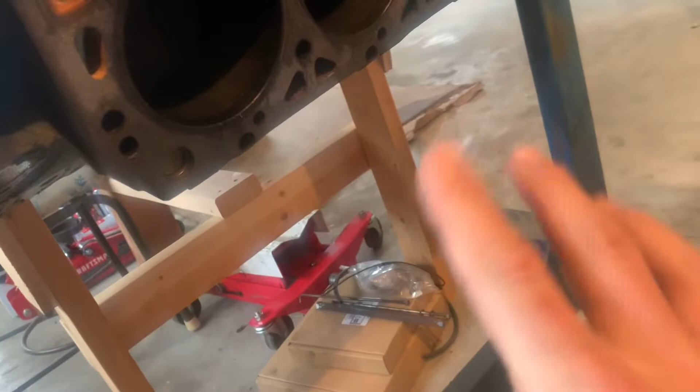Normally these are a dry liner, integral type liner engine. Single casting, I think the block weighs about 300 pounds without anything in it. This one's currently got pistons in it. As you can see, it's a closed deck type block with 1, 2, 3, 4, and I think 5. Or there's the 5th. Yeah, count them, 5 bolts per cylinder. That's your block drain. Let's go ahead and swing this puppy out.

I don't think that you're supposed to deck these blocks more than 0.010 of an inch, because you can encounter clearance issues between the flat cylinder head and the pistons. Here's a block heater, and there's where your dipstick would go, and there's a little adapter on it. These, of course, have a 4-bolt main, and they're 5-main engine.

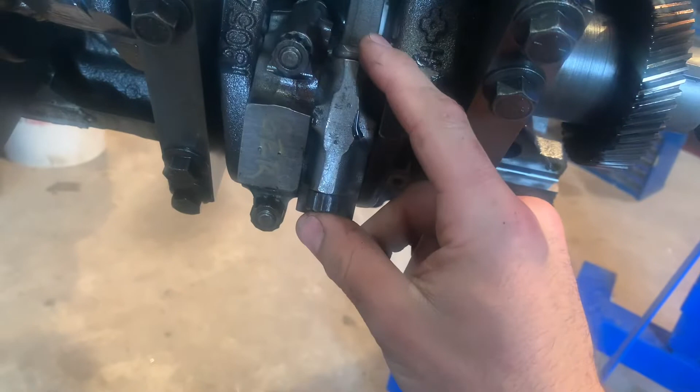These non-turbo IDIs have a little bit thinner of a connecting rod and a thinner wrist pin, full floating wrist pin. 2 of these, of course, 2 rod nuts and bolts. I don't know if you can see that up in there. Right there, they have piston oil cooling jets for underneath the pistons, and those are, I think, supplied by a little bit larger oil gallery in the turbo blocks.

The turbo blocks are a little stronger, 17% bigger oil galleries, bigger wrist pins, connecting rods, and different pistons with keystone piston rings in them. So they don't recommend turbocharging these non-turbo IDIs. Anyhow, these are a forged and nitrided crank, which can be cut by machine. You can go 10, 20, or 30 thou undersize.

After that, junk the crank. I think there's 10 oil pan bolts per side. Cork gaskets, which are a pain in the ass. But you can do these in the truck if you undo the motor mounts, disconnect the coolant hoses, and then lift it out. There are nine threaded cap screws, which hold the flywheel to the crankshaft flange here.

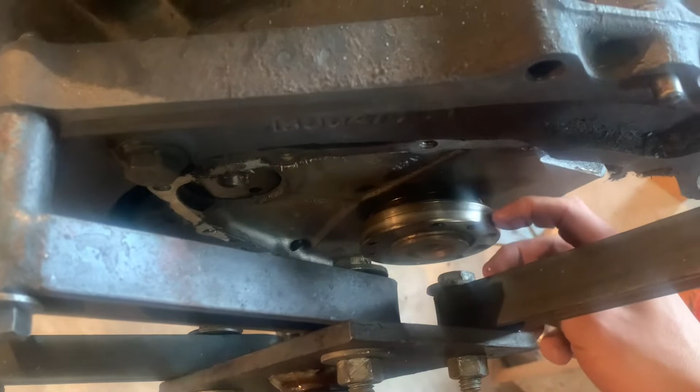And then, much like a 7.3 Power Stroke, the rear engine cover, or the rear crankshaft cover, presses the Teflon type or PTFE polytetrafluoroethylene type seal into the back. Install that dry. As you can see, there's a little bit of a lip right here where the old seal wore into the crankshaft. This is the pickup truck adapter plate.

As you can see, this adapter plate is bolted to the engine block by these 2 threaded cap screws. There is also a round type SAE bell housing for buses and medium duty trucks. I think these went up into the F5, 6, and maybe the 700 series Ford medium duty trucks.

Not a particularly powerful engine. I think this one is rated at 170 brake horsepower and 338 pounds of torque. I don't remember at what RPM. Anyhow, they're really quite a simple casting. Not a lot to them. The valves, or whatever you call these lifters, are held in by a single plate, which acts to hold down the bridges in between each pair of lifters. Let's go ahead and push this back.

All right, moving over to the cylinder heads and the other assembly. Don't mind the complete mess in the shop.

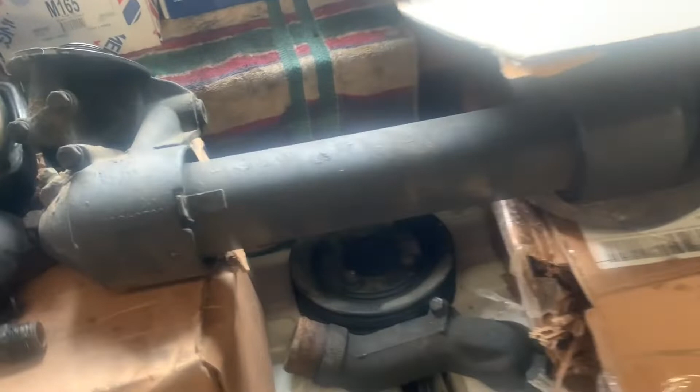They have an external type oil cooler, as is seen on most medium and heavy duty diesels. They have a single external fuel filter. These are the standard log type exhaust manifolds with 2 bolts per cylinder. They have a standard vacuum pump, as well as, you can see, this is your injection pump gear housing. Those are your lifters up here. As you can see, it's a hydraulic roller type lifter. Roller in the bottom. Check those against the cam.

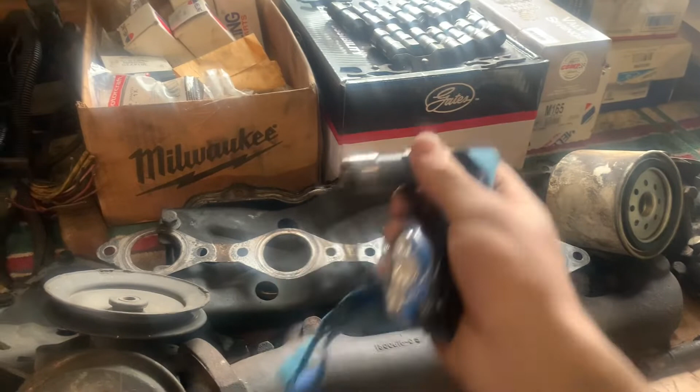I have a whole bunch of parts for them. There's the shitty old harness. I have new valves and valve springs. I have a couple of gasket kits. There's your harmonic balancer, and there's your water pump outlet.

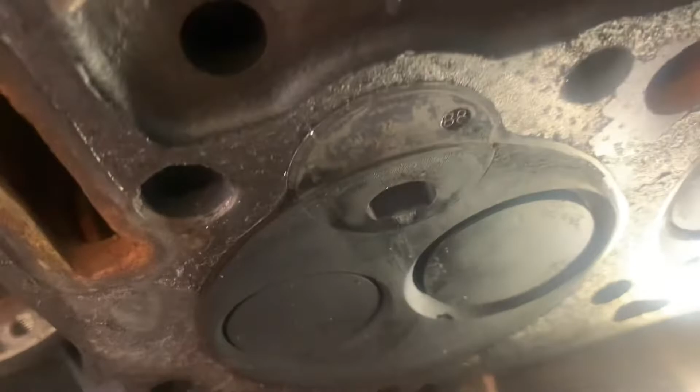Now this illustrates one of the primary problems with these IDIs. People complain about getting them to smoke, but I don't know if it was this one. Maybe it was... No, it was this side. Okay. You can probably hear this. I can catch my finger on the crack in the cylinder head. It's very common for these to crack the intake valve seats. I don't know why I'd expect it out of the exhaust valve seats, but they commonly crack the intake valve seats, and they commonly crack between the cylinder heads. They are repairable by a big shop, but not by me.

These use hardened steel valve inserts and a, oh, you can't really see that, can you? That's an Inconel stainless steel pre-combustion chamber. And as you can see, there are small cracks in it. These cracks aren't a problem until they get past the fire ring surface there.

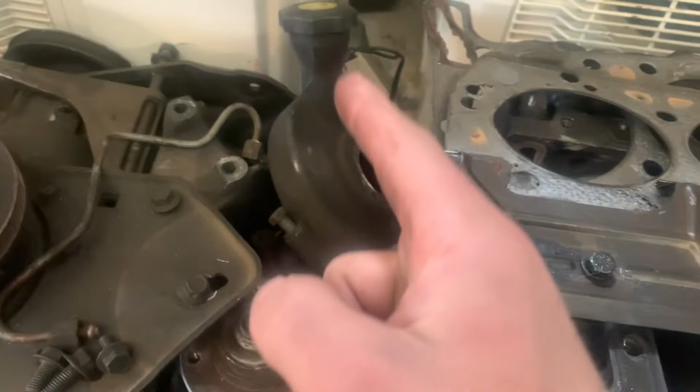Okay, what else? Oh yeah, this is the retainer for those valves. And there's another gear housing. As you can tell, it's for a 7.3 because of the outlet cap instead of the one that comes out of the front like a 6.9. And then these 2 wires in the back are for the tachometer.

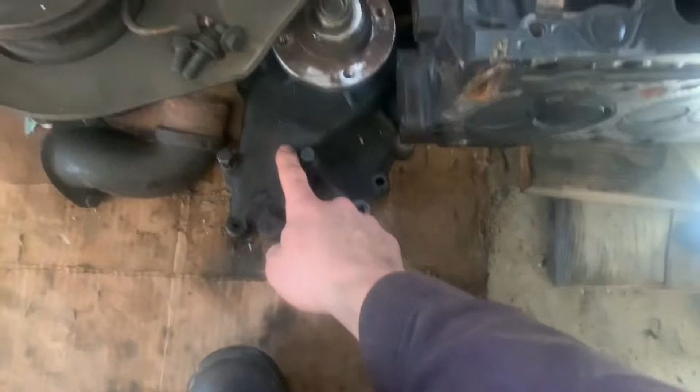This is an air conditioning compressor off that same engine, and this is the water pump. This, I think, is the inlet to the block. That comes out of the bottom, and that is a 7.3 fuel filter housing. As you can tell, it's quite complicated. 6.9s are better because they have fewer attachments on them.

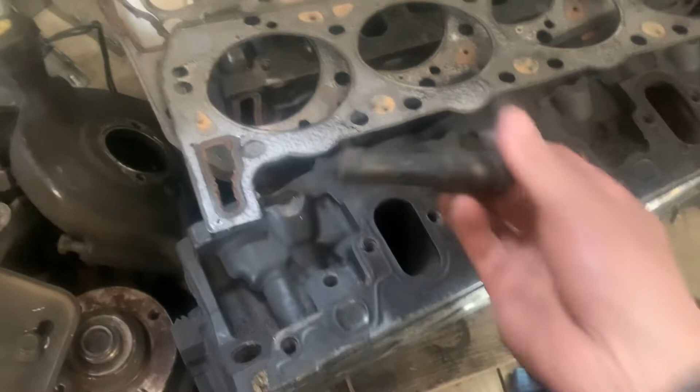These are the Stanadyne injection nozzles that mount into the pre-combustion chamber. These are a pretty common problem in that these copper crush washers that go around the bottom will not seal against the cylinder head because the bore and the seat that have been cut get eaten away because people don't change their injection nozzles. You have to take these out and test them on an injector tester or a poppet nozzle tester every 50 to 100,000 miles.

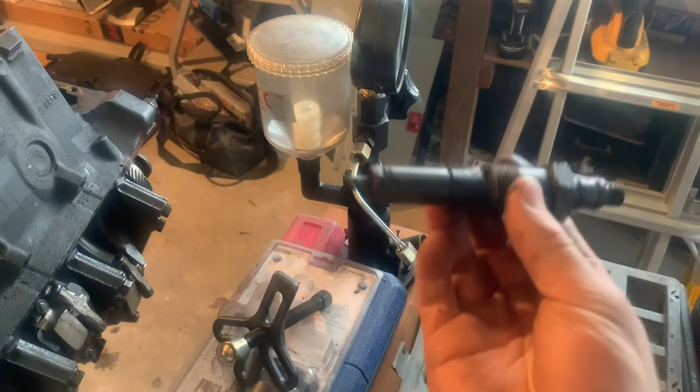Depends on the kind of driving that you do and towing with it, but as you can tell, this is a VVOR injection nozzle tester. I think it goes up to 8,000 psi, and this is how you test it: fill that up with diesel fuel, crank on that handle with this in it. Check the spray pattern, check for leakage and drips, and check the pop pressures.

They're pretty simple to check, but if you don't do it, you run the risk of washing your cylinder walls down with fuel, as well as overheating the engine. Overheating the engine is one of the main causes of cracking a head. These generally don't warp the heads, at least in my experience. I've worked on many of these, but they will crack heads.

I've taken apart 2 6.9s and a 7.3 like this recently, and all the heads off of all of those engines were cracked, primarily because people don't check their injection nozzles and they overheat them. Another cause of overheating can be lack of coolant maintenance, which is a big problem.

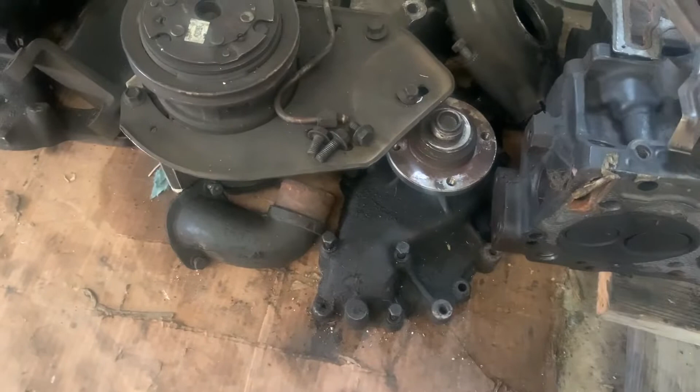We'll come back over to that engine block right now. The 6.9 liter has a 4-inch bore and a 4.18, or 4 and 180 thousandths, stroke.

If I'm not mistaken, it's slightly under square, whereas this is a square engine exactly. So this is a 4 and whatever 1.5 bore and stroke, or somewhere thereabouts. But the cylinder walls on these are 100 thousandths thinner on a 7.3. The 7.3s have a 100 thousandths thinner cylinder wall, meaning that you have to be religious with your coolant changes.

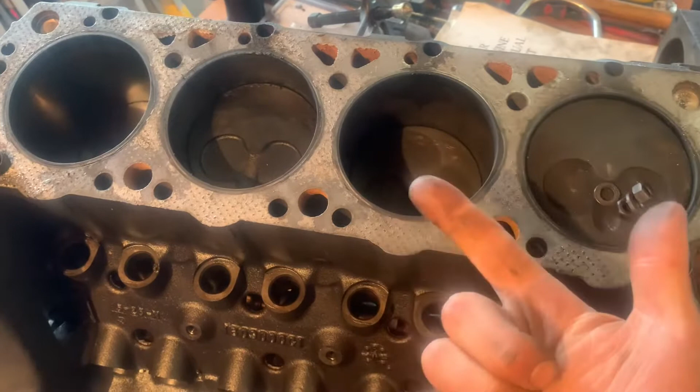If you aren't religious with coolant changes, then you increase the acidity of the coolant, which can eat through head gaskets, as it did on my Tacoma, common problem for the 4 liters, but it can also cause cavitation to occur around the outside of the cylinders. If I had a freeze plug out, you could see onto the back of the cylinder. It'll cause tiny vacuum pockets to form against the outside of that cylinder wall.

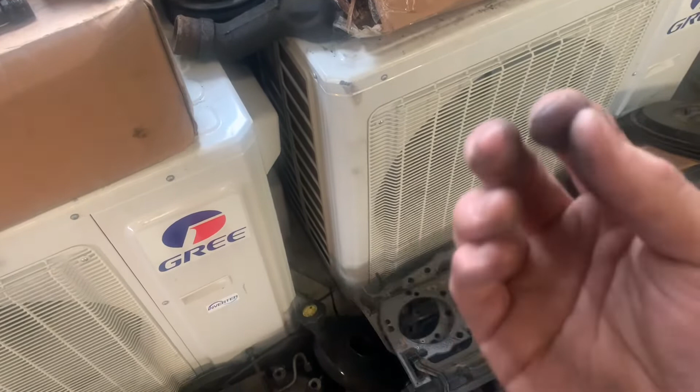And that isn't necessarily the problem so much as the collapsing of that vacuum pocket, which will take tiny or microscopic amounts of cast iron away. It depends on whether it's been sleeved or not, but either way, it'll take tiny amounts of metal away from that cylinder wall, and eventually it'll eat through the cylinder walls.

You have to be religious with your coolant changes, and whatever coolant you get, if it doesn't already have a supplemental coolant additive package in it, I recommend that you get one of those, because the silicate additive replacement keeps it from eating away at the cylinder walls.

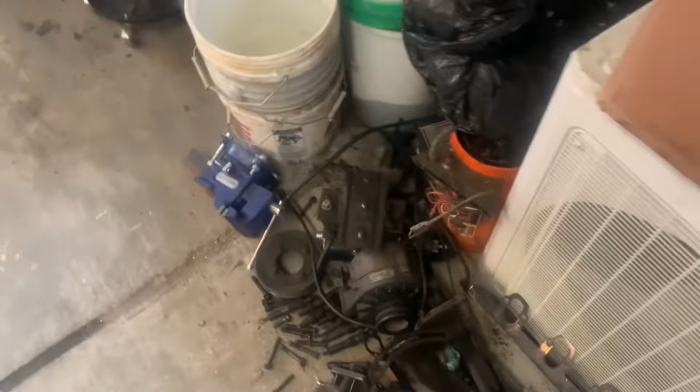Okay, over here we have the Roosa Master or Stanadyne DB2 plunger type injection pump. This maxes out at 57.5 cubic millimeters per stroke of the injection pump. That's its maximum fueling rate. I don't remember what the governor style is on it, but I need to take this one apart anyhow and free up the plungers and rebuild it a little bit. This is, I think, off of a turbo engine, so I don't know what they did to the pump.

If you see these pumps leaking, they're not terribly difficult to take apart. You can unstack them from the nose cone. You can take this head out of the body, and you can take the shaft out the back of the block. You can get reseal kits for these for like $40, and they come with all of the things that you need: seals, plungers, and other internal components. This is your top cover.

They call these a one-wire diesel for a reason. All that you need to do is supply power to this stud, and then ground to this back stud, and the engine will run, because the fuel shutoff solenoid will open and allow fuel through the injection pump. So, leading to another common problem.

Well, first of all, these pumps can be weak, so if you ever replace injection nozzles, it is recommended that you do all the injection nozzles at the same time. I recommend getting Stanadyne or Delphi replacement nozzles instead of rebuilt ones. I've had bad luck also with rebuilt injection pumps causing smoke, no start, and severe low power issues. Another common problem is these return lines.

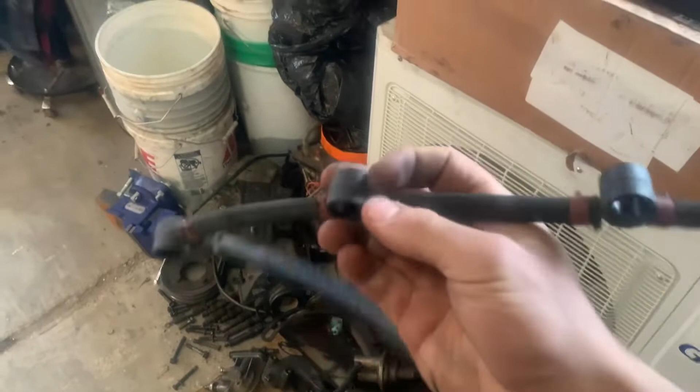So coming back to the cylinder head, you all have probably heard of these infamous plastic return lines. It's a very cheap and chintzy way of doing it, but these plastic return caps sit over the top of these injection nozzles. Let me set this on my knee here. As you can see, this return cap fits over like that, and then there's 2 O-rings that sit in this injection nozzle, like so. And then these rubber return lines direct fuel from this back to the tank.

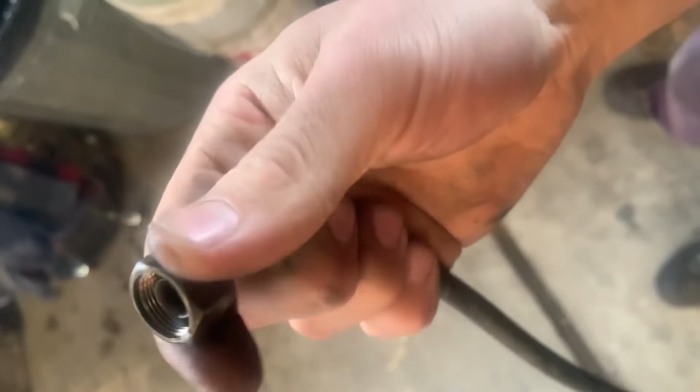So these return lines will crack and age, and every 3 to 5 years you should probably replace them, because they will leave you stranded. Another thing that I really hate about these IDI fuel systems is, you can't see it here, but there's these rubber fuel olives that live inside of these single flare fittings, and these fuel olives are a big source of pain for me, having to replace them constantly.

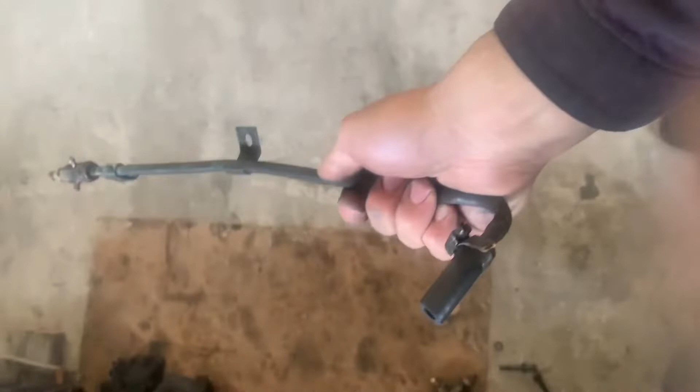This is one of the fuel return lines that runs down the valley of the block, so that's the front of the valley pan right there. So your injection pump would be sitting right here, and this runs up to the injection pump.

And inside of this junction as well, there's a fuel olive here, and there used to be one here, but whoever owned this was smart and cut that piece of shit off and put a chunk of hose on it. Hopefully they single flared it, or they used a double flare tool and did the first part of a double flare to keep that rubber on.

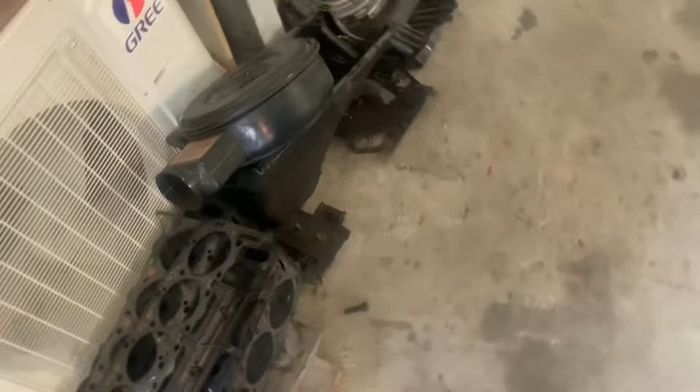Not my concern. They are pretty bulletproof engines because they are so low power, but they do have their quirks. It's like a Harley Davidson, i.e. it's so low power that it won't ever wear the engine out. Whereas a DT466, a 7.6 liter, which is marginally larger, will cause problems if it's not taken care of religiously. I take it the newer ones, the electronically injected ones, can develop blown head gaskets and oil consumption problems. But I'm not a heavy equipment mechanic, so I couldn't tell you.

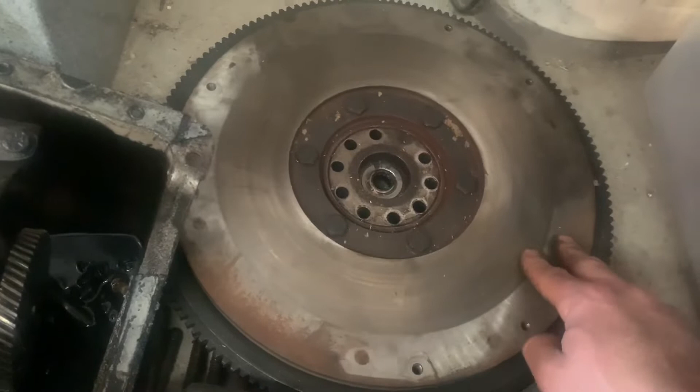Now this is an example of a dual mass flywheel. This is another one of the hated things about the ZF 5-speed transmissions that back these up, Zahnradfabrik, or I call them Kraut-built transmissions. Goddamn German puzzle box. But this mitigates the vibrations caused by this very robust diesel engine, which they claim will wear out the bearings. I don't know. It's just ZF being stupid. My truck, that old white diesel that I have on the channel here, has a single mass flywheel conversion in it. God bless whoever did that. They also have a stamped steel timing cover in the front and a stamped steel rear crank seal in the back.

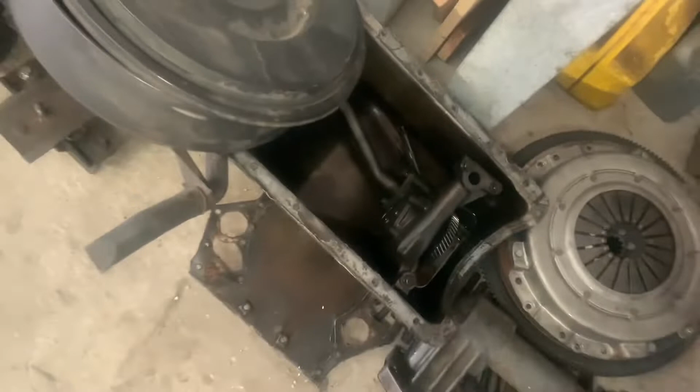This is the gear-driven oil pump out of that same engine. If it doesn't have any play when you open it up in the gear teeth, then it's pretty much guaranteed to work. I usually put a little bit of heavyweight engine oil or gear oil in them when I'm putting them back in the truck, just to make sure that they have prime and that I don't run the engine without oil.

These are a pair of remanufactured cylinder heads that are absolute pieces of shit from Odessa Cylinder Head out of Florida. I recommend getting a $300 or $500 pair of verified magnafluxed and cut heads, and then putting valves in them yourself. You'll be a lot happier than spending $1,900 on something that is shittier than the work that you can do in your garage over the span of 4 or 5 weekends.

Let me see if I have one. No, I don't think I have a rear main seal in here left. But this is a front crank seal, and the rear crank seal looks very similar to this, but it says install dry because it's a PTFE seal. This front crank seal and the other rear crank seals are not, so you install them wet. I usually lubricate them with engine oil or grease.

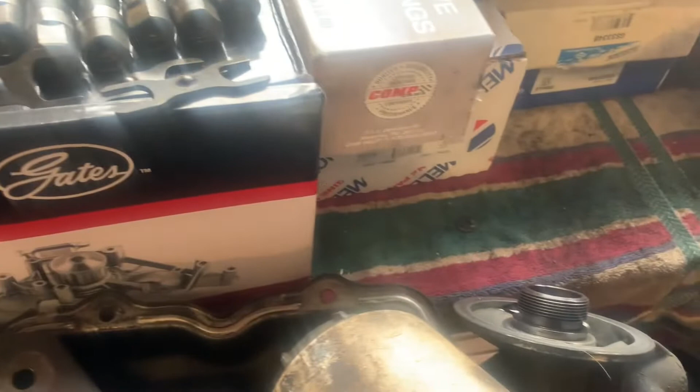Standard valve cover gaskets and valve covers or rocker covers, depending. There's a bunch of different sensors that live on them. I don't remember the part number for these crankcase depression regulators, whatever you call them, but this serves the same purpose as a positive crankcase ventilation. There's your part number. If you need a CDR valve, I recommend going Ford for these, but the only place you can find them is on eBay.

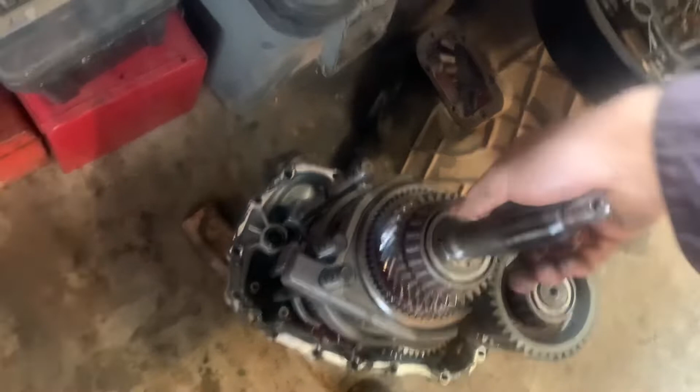This is only tangentially related, but this is a ZF5 with a 420-pound rating on it. I just put this in my truck, and it is locked into 4th gear. I don't know if you can tell, but the synchronizer ring here will not move back and forth. I am forcing against it, as you can tell, and I am moving the whole transmission. So this sucker welded itself up, and I got to take that transmission right back out, which I guess I'm good at taking ZF transmissions out now.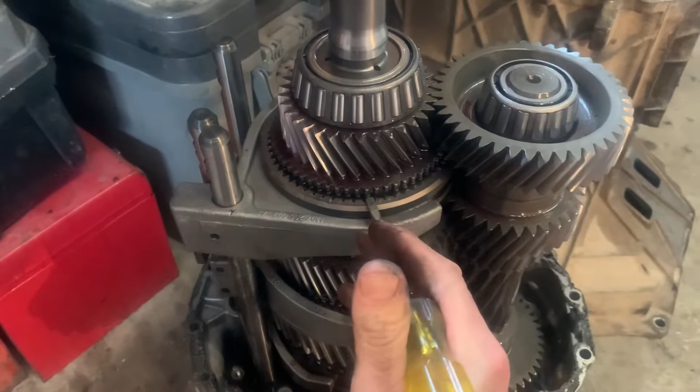But you can see this one moves pretty freely, which it has to move just a little bit inside of that hub and slider assembly. Otherwise, the slider here cannot synchronize. It cannot force this blocking ring up, and the tabs keep it from going over and engaging the teeth on the actual gear before the synchronizing action against the cone clutching surface of this input shaft has been achieved. It's actually a pretty clever little design, but I don't really know how it welded itself up. Maybe I used Mercon 5, and maybe that caused the problem.

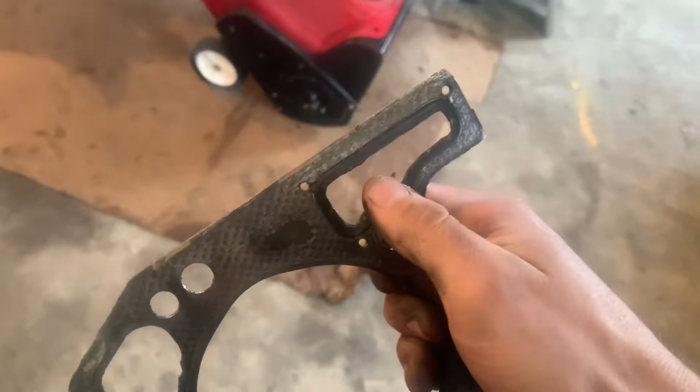I don't know. This is a 6.9 liter IDI head gasket, but it illustrates the problem perfectly well. This is a composite head gasket. I recently learned that these are made by the Beater process. These are made out of asbestos, graphite, etc., and they're stamped into place with these steel fire rings. And then at each end there are these Viton rubber O-rings that seal in coolant. Those are coolant passages.

This, however, will indicate just exactly where your head gasket's blown. As you can see here, there's a lot of soot, etc. Well, the light's not great over here. Let's do this over on the workbench where you can see it better.

All right, let's move some things around here, get these out of the way, and get all my shit greasy because I'm a grease pit.

Okay, so these composite head gaskets are older technology. I think they came around in the 1940s with the Beater process with World War II, and they really tried to phase them out in the 1990s. But you still see these popping up randomly from place to place. Anyhow, you can see how this area is eaten away by highly corrosive, high temperature combustion gases, which eat past this fire ring.

This is another problem with these. As the engine runs, the cylinder head gets lifted away from this head gasket by upwards of 1/1000th of an inch. While these are running under full load, they can experience anywhere between 3,000 and 4,000 pounds per square inch above the piston, which can in turn cause head gasket sealing issues if the engine is overheated.

But again, you can see where this has just been eaten away and where soot is really intruding into the head gasket. Okay. Well, I'll go illustrate next the problems that are had with the sealing of that injection nozzle against the cylinder head's bore and seat in there.

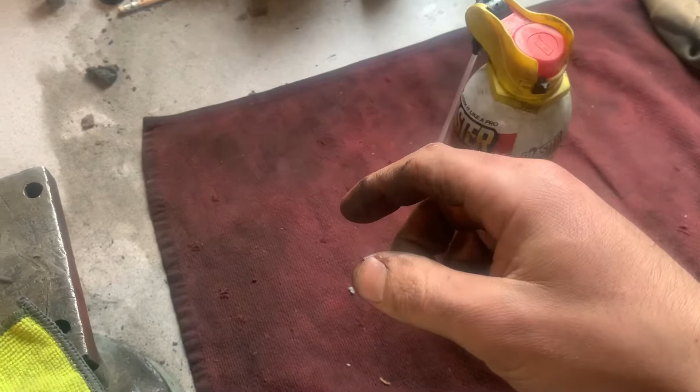I was talking to a gentleman who works at Napa. He used to bend wrenches, and he was mentioning to me that you can put crush washer after crush washer in there and it still won't solve the problem. So what I usually do to test that is grab something like PB Blaster or WD-40 like this, shake it up, and then I'll spray it around the threads that are exposed near the cylinder head.

So I'll drop an injection nozzle here. This one still has threads on it. There's one that doesn't have any threads on it anymore. This was one that we used to pull another one out of these cylinder heads. Another part of an injection nozzle. But as you can tell, this injection nozzle would sit about like this in the cylinder head, and there would be threads here. So normally, when I first start the truck up, I'll spray some PB Blaster in here, see if it's leaking, and then I'll continue to run the engine.

What I've noticed with these engines is generally if you have one of these seats and it's not too far gone, the engine will run fine. It'll actually have some oomph behind it, but as it warms up, the misfire will get worse and you'll be able to start hearing it misfire as the engine's running. So that's just something to be wary of.

If you have the proper bits, I'm sure that you can recut the injector seat and get your crush washer to seal there. But again, I'm unsure of how thick the cast iron is underneath that injector nozzle seat, so that is something to be wary of. Try to take away as little material as you can if you were to try and recut that injector seat.

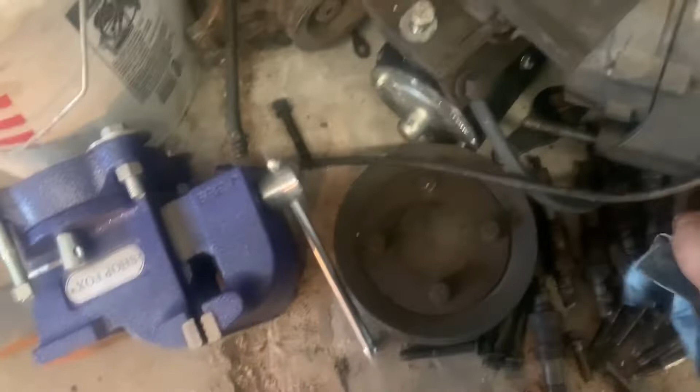Another thing to note, if you want to get that seat cut flat, then you can measure the diameter of this pintle tip right here above my middle finger. And then get a drill bit or something else that is the same diameter and use that as a pilot to keep that flat and concentric inside of the bore that injection nozzle seats in.

That really does outline, verbally at least, the common problems with these engines. I did have the main caps off and the rod caps. I'm going to pull the piston so I can hone the bores, but it's very common to see, well, some shit fell down into these, but to see scoring along the inside of these cylinder walls, as well as to see severely scored piston skirts. Excuse me.

And that can happen from a lack of oil. I took apart a 6.9 where all the cam bearings had been wiped out in it, and the rod bearings in it were likewise pretty well seized. It had lower than normal oil pressure, so it's another thing to be wary of.

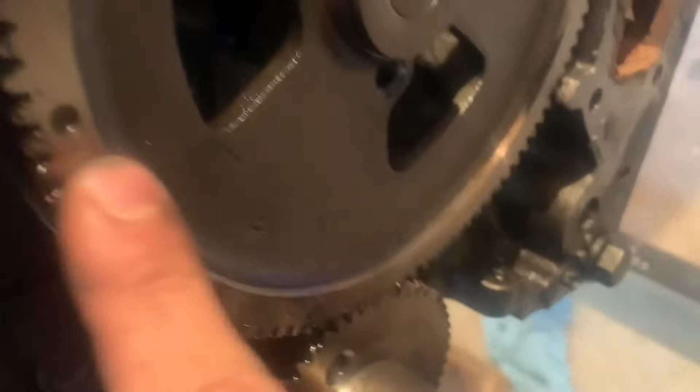I always inspect the camshaft journals too if I have them apart, and I might go ahead and pull this camshaft out. They're not hard to time. You just line up a couple of dots over here. I think their older ones are Y to Y and the newer ones are dot to dot for the injection pump, and then I don't remember. Maybe there's Ys. Yeah, as you can see, there's a Y right there, and then there's a dot right here, and there will be 2 dots on the injection pump gear, and you put this dot between the 2 dots, and that'll align the teeth properly.

Or maybe it's, no, it's these two dots, I think, get lined up. Either way, don't trust me. Refer to your service manual. I use this Ford OEM 6.9 diesel engine supplement because these are basically the same engine. This one's just been bored over. The valve trains in the 7.3s I've heard are a little bit heavier duty. I haven't been able to notice any differences between the two, but

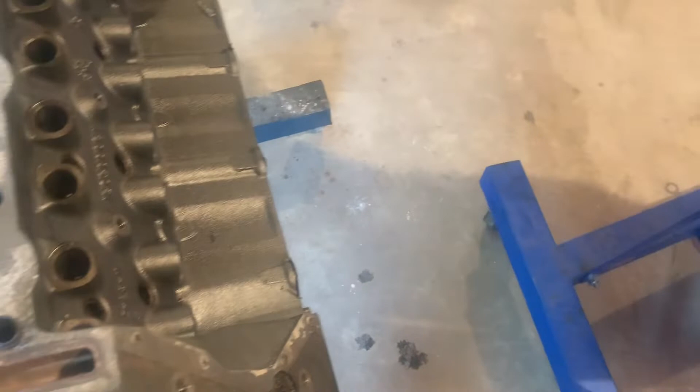whatever. These 7.3s also utilize a 1/2-inch cylinder head bolt versus the 6.9s utilized a 7/16 shaft diameter cylinder head bolt. So that's something to be aware of. The heads do not interchange between them without some machining and creativity.

Just a beautiful day out there. Looking towards the mountains to the south.

All right. If I think of anything else, I'll interject it somewhere in this video, but I don't anticipate that will be it. If your IDI blows a freeze plug out the block, then suspect a cylinder head gasket. That's one of the engines that I bought. I bought 2 6.9s and a ZF off the internet, and all 3 of them have fucked off on me. So I would not recommend buying parts off the internet. Or if you're going to do it, have them rebuilt. And these are getting harder and harder to find parts for.

Oh yeah, there's the vane type power steering pump, Saginaw or whatever. They always whine, but I've had good luck with them on these IDIs. They're a little heavier duty. Oh, here you go. Here's the turbo. So everybody loves turbos on these IDIs. It really does wake them up. And they need it, you know, turbos and diesels go together, bread and butter.

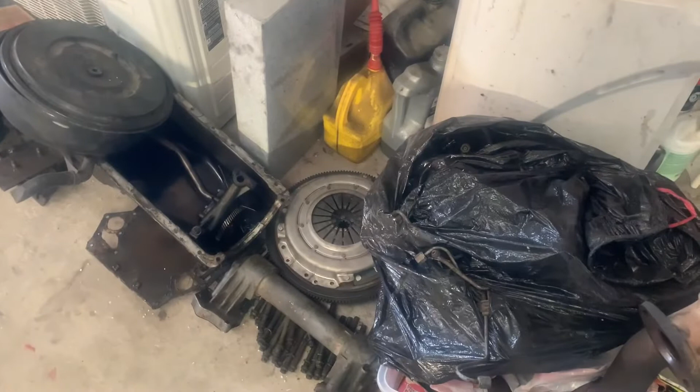But the problem with these IDIs is they're such a high compression engine, right? The original 1983 6.9s had a 20 1/2 to 1 compression ratio. The 6.9s after that, 84, and then the 7.3s had a 21 1/2 to 1 compression ratio. So if you start forcing extra air into them, they don't cotton particularly well to it. It does wreak havoc on the piston rings. It can bend connecting rods and wrist pins, which again is why the turbo motors have thicker wrist pins, keystone rings, etc.

But if you're going to do this, this is a factory turbo downpipe. I don't want to go digging through it, but I have a bunch of parts for it in here. Anyhow, yeah, there's a turbo manifold. But generally they run 10 to 12 pounds of boost maximum, 5 to 6 normally. Again, they're just such a high compression engine that you really do risk bending parts when they're running. They weren't originally intended for turbochargers, so that's why you see things like even an old 12-valve Cummins or the newer Duramaxes or Power Strokes have 16 or 17 to 1 compression ratios, so they can run higher boost pressures.

Aftermarket manufacturers do sell pistons for these IDI diesels. Lower compression pistons, low deck pistons, that will decrease the compression ratio enough that you can force 20-30 pounds of boost into these without risking not detonation problems, but pre-ignition, hot spots, and bending parts. So yeah, hyper-eutectic pistons too, I think. Don't quote me on that, though.

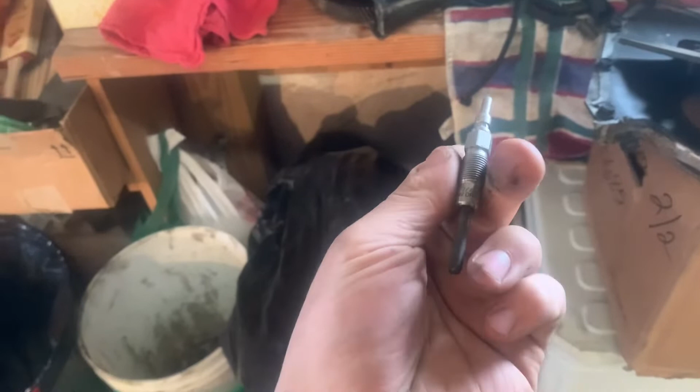Okay, so this is an example of an aftermarket glow plug. I absolutely do not recommend that anybody ever uses anything other than the Motorcraft ZD9. That is Zebra Delta 9 glow plugs. They're the bullet style glow plug with these small tips, and then they have a connector on the back, which is mirrored by a bullet style connector that comes out of a wiring harness.

Don't mind me. But as you can see, this is what happens over time. These wiring harnesses get really shitty, they get really old and really brittle. I just redid all the glow plug wiring in the wiring harness in my truck that fits onto the end of these.

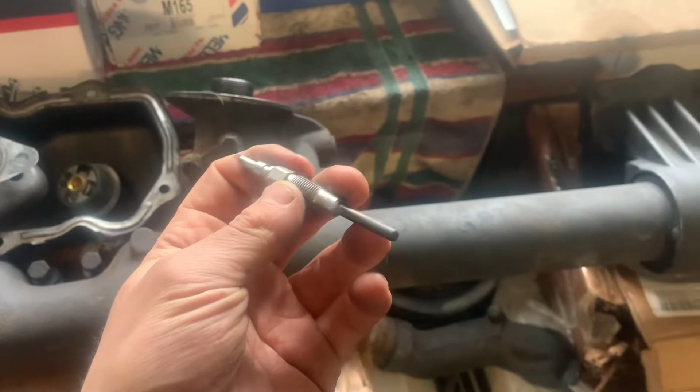I don't have the packaging here anymore, but I think it was Swag Performance Parts that sells a kit for $14.99 or whatever of heat shrink style glow plugs. I pulled Autolites out of these cylinder heads that came out of the block over there, and the tips of all of these were eaten almost halfway back.

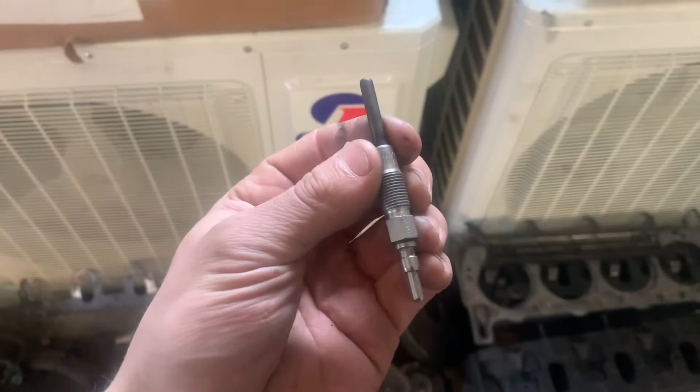The guy that I bought it off of pulled one of the glow plugs and thought he broke it off in the head, but he hadn't. The tips of these had been eaten all the way back to right about there. Every single one. Do not buy anything other than Motorcraft glow plugs. You will break them off or they will disintegrate and fall into your cylinder head or into your combustion chamber.

Another thing, people will use ether with these, and Sam was mentioning that if you use ether enough and you hard start it enough, eventually these hardened Inconel pre-chambers will crack along there, and they can drop half the pre-chamber into the piston and destroy the engine that way. Ether isn't the hardest thing on them, but it's not recommended that you use copious quantities of it.

If you plug it in and you use the glow plugs, these have a solid state controller, so the solid state controller expects to see a certain amount of resistance and a certain voltage, and if one of these glow plugs burns out, then the resistance becomes too high in the circuit for the amount of amperage that it's trying to pass through at a set voltage, and so the solid state controller turns off.

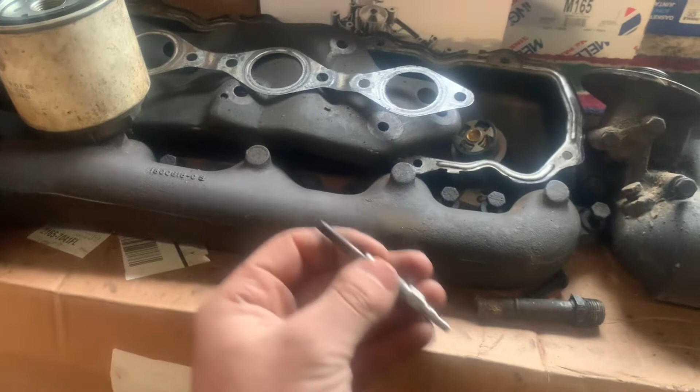And then it turns back on, sends some voltage and amperage to the circuit, sees that there's too much resistance, and turns off. And that's why they short cycle and click, click, click, on and off, back and forth. That can be an indication either that one of the connectors right there that I just showed you is burnt out, or is arcing, or has too much resistance, or is broken, or that the glow plug

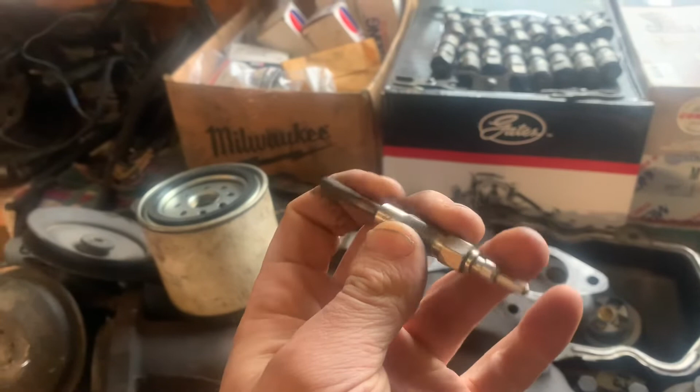itself is burnt out. You want to see between 0.01 and 0.06 ohms of resistance, I believe, between this pencil tip and the threads to the body of the glow plug, because they ground through the cylinder head, which is another reason engine grounds are important. I think the fuse is rated to 100 amps for these engines, but I think they draw between 40 and 60 amps, depending on how cold it is outside.

Okay, I covered ether, covered the glow plugs, the wiring. Yeah, these IDI diesels don't start well in the cold because you see how flat the cylinder head is, and it's a 21 to 1 compression ratio, 21.5 to 1. So as that piston comes up, all the gas is forced out of the area above the piston and up into this pre-chamber here, which is fine and it works,

but all of the heat that's developed in the combustion chamber, at least this is my working hypothesis, by the compression of the gases between that piston, which is traveling up in its bore, and the stationary cylinder head and valves, is dissipated inside of this pre-combustion chamber. Right, so any residual heat that you had inside of here, it really does get sapped away.

But that really wouldn't make sense to me if the entire engine is 3 degrees below 0 Fahrenheit. Then the whole engine is going to sap heat away. It's odd to me that they don't start well in the cold, but they will not start without glow plugs, it seems, unless they are freshly shut off from being hot.

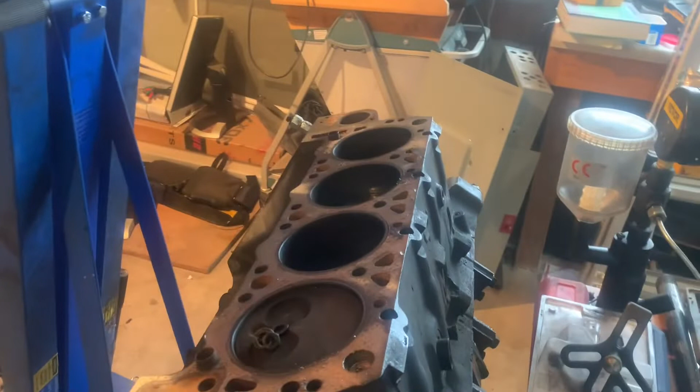Another thing, people always claim that these engines can't be run at high RPM, but consider people build big block Cadillacs, Chevrolets, like those old 472 or 500 big block Cadillacs, or big block Chevs, big block Fords, and they'll run them up to 5,000 RPM with the right valve springs, and the same is true of these IDIs.

If you adjust the valve train, i.e. the push rods, the cams, the lifters, and the valves, as well as the valve springs and the rocker arms, you can actually get these things to turn upwards of 4,500 or 5,000 RPM. I have no interest in doing that, and I don't have any resources to back me up, so I'm not going to make that claim in earnest, but I've heard that is what you can do to these engines. Either way, these engines will run happily anywhere up to their fuel-governed top RPM of 3,600.

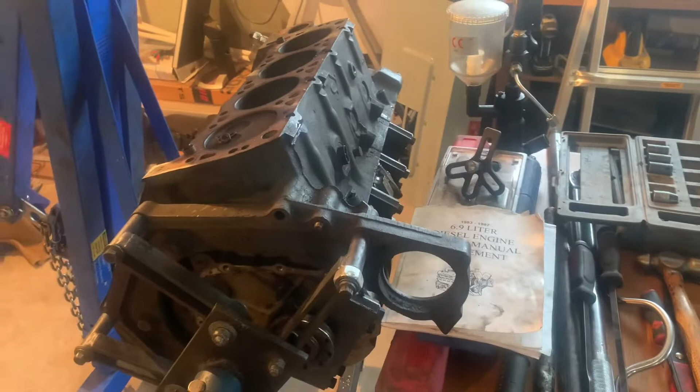I've towed with these just fine, turning 2,800 RPM, 2,900 RPM, doing 75 or 80 on the interstate, and haven't ever had a problem with them. They sing, actually, quite happily. They like revs. Zip ties and bias plies, I think, is correct in that assertion. These engines really do like revs. Sam was also mentioning that, the gentleman I talked to. These motors like revs, so that way they can flow more air and produce a little bit more power. They aren't like a big old NH or NTC Cummins where they don't like going fast. They're torquey, but they need RPMs to produce their optimal amount of power.

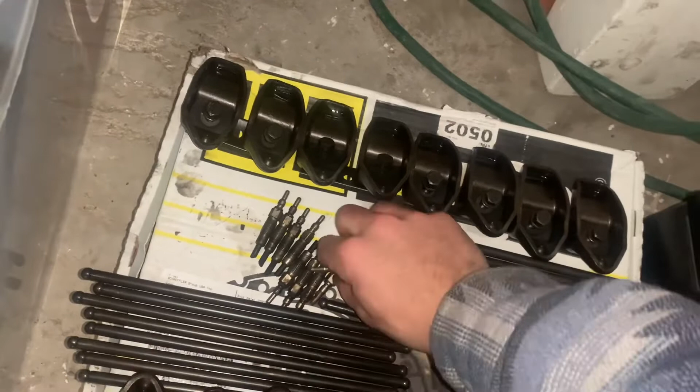Okay, well, my phone just shut off, but I don't think I showed you any of this, so hopefully I'll remember to kill that last video.

Oh, this one's perfect too. Right, see, this part of the wiring harness came off with it, which is another reason these glow plugs suck. The wiring on them is just awful. But look at that tip. Look at that tip. And notice how every single one of these glow plugs' tips are eaten away.

Look at that. They're supposed to be nice and round, and they're supposed to be a little over 1.25 inches long. And what are all these? 1/2 inch, maybe 5/8, and they're all eaten away. That's really bad for your cylinder walls. It's bad for your valves. It's just bad for your engine. Don't buy Autolite glow plugs.

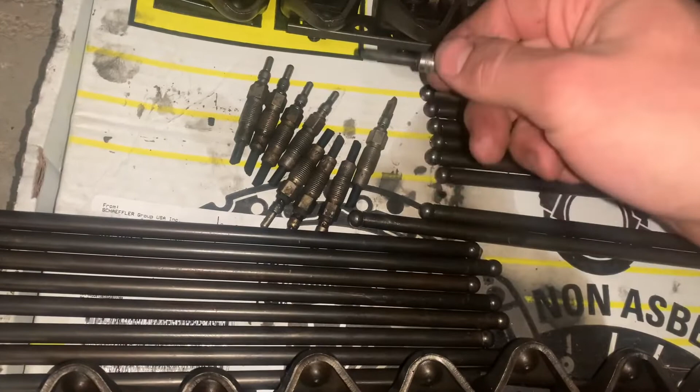They're awful. These are standard type hollow push rods that supply oil to the rocker arms. They're interchangeable, of course, because they're a hydraulic roller lifter. Then here are the rocker arms. They exist simultaneously on a bridge that returns them to their position as they flex. Pretty bulletproof, really. But yeah, again, if you know what you're doing and you buy quality parts, you won't have these problems. But flounder long and hard enough and you still don't have any guarantee of success.

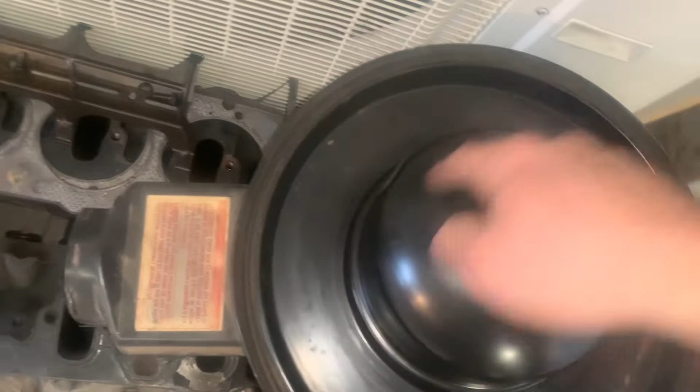All right, another two problems, air filters and glow plugs. So one of the things that people hate about these air cleaner assemblies is this big bowl; people always claim that it's super restrictive to the flow of the engine. I mean, it's such a low power diesel. I really suspect that's not a huge deal, but yes, if it helps, cut that out.

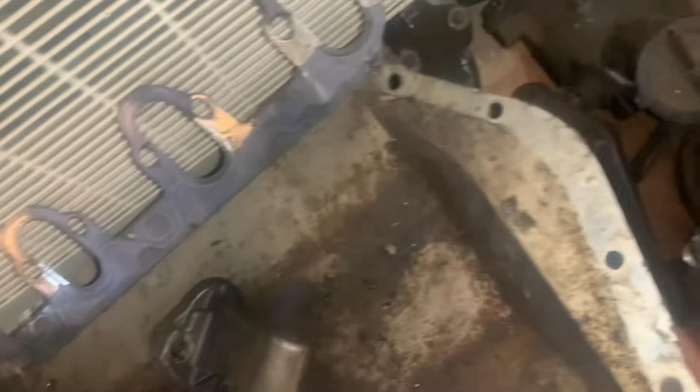Let me see if I can't find any glow plugs here. Oh, I thought I'd left them somewhere over here. But you'll have to bear with me for a minute here while I look through my shit.

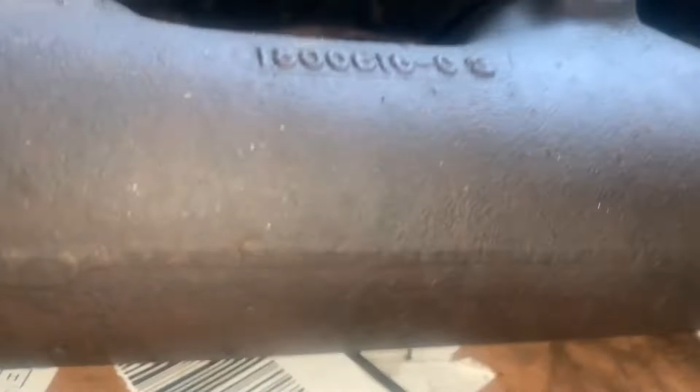Yeah, there's the thermostat. Always buy a Motorcraft thermostat. The aftermarket ones don't cotton real well to these old IDIs. And then usually I put the jiggle valve facing up, but it depends. Some Toyotas require that you put the jiggle valve facing down. Here is the rear main seal housing, and there's the rear crank seal. This one's brown, so it's probably an aftermarket National seal. That one you install wet.

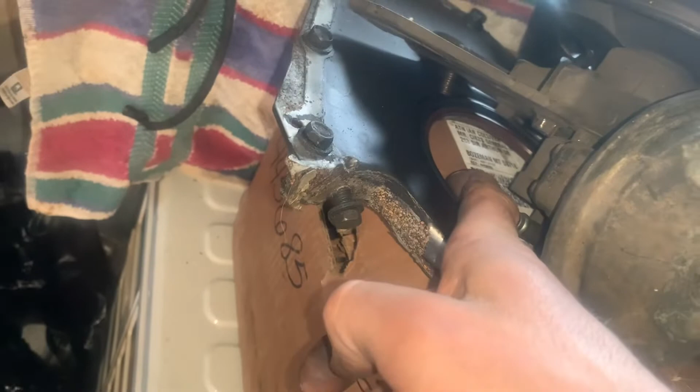Good Lord, where did I put those glow plugs at? Might have just thrown them out, but I'll have to find those.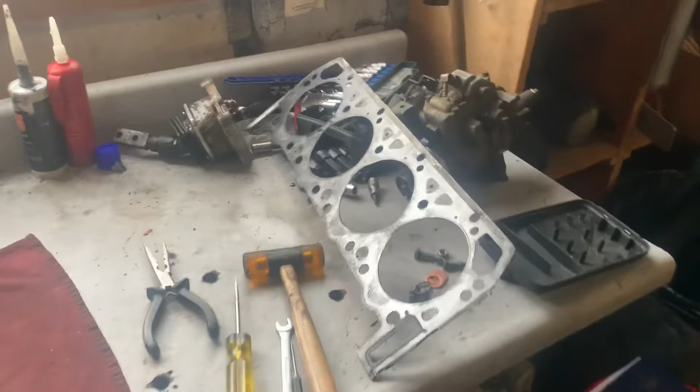So I think that pretty well concludes the overview of common problems with these old diesels. They're finicky, but if you know what you're working with, and if you know how the system works, and you screw with it for long enough, i.e. 2 years, and you actually get comfortable with it, then things start to make sense, and you're able to quickly and concisely diagnose problems with these diesels.

Another thing, compression numbers on these trucks: we're up about 5,100 feet above sea level, so we see severely reduced compression readings. However, up here anywhere between 300 and 330 pounds per square inch is pretty normal. Down at sea level, upwards of 370 to 390 is fairly normal. Again, it just depends on the health of your engine. But realistically, the readings should not be any more than 15% apart. So you take the highest reading and then you see how far of a percent difference the lowest reading is from it.

And if it's more than 20%, or 15% rather, then you know that you have some issues and the engine probably has a valve sealing problem or has worn piston rings.

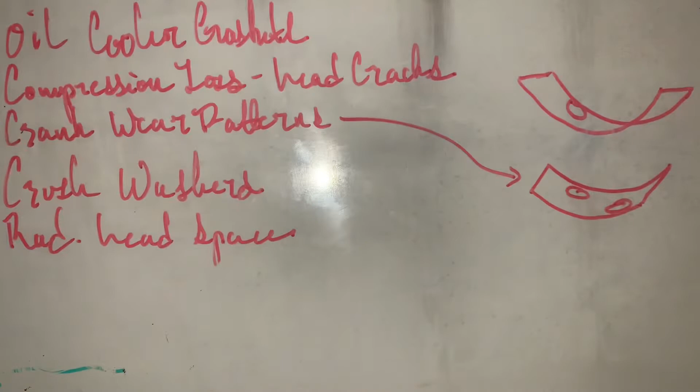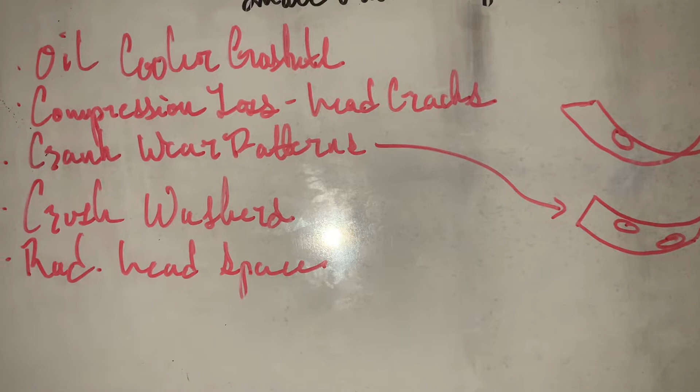Okay, so the final thing that I wanted to go over in this video was the things that I forgot to mention earlier. So the first of which is the oil cooler gasket issues. The O-rings which seal the coolant and the oil away from each other inside of that oil cooler instead of that external type oil cooler can cause issues where you get coolant in the oil.

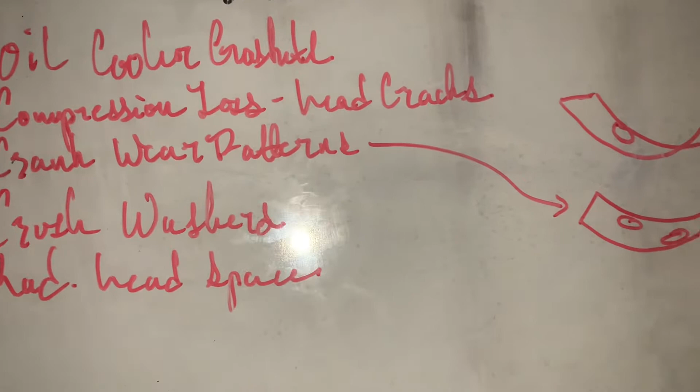More common with a head gasket is that you'll pressurize the cooling system. They don't really eat coolant because they're so high compression. At least that's what I found with that 6.9 that I blew a head gasket in. Well, I bought it with a blown head gasket, but that one pressurized the cooling system. The oil cooler gaskets are what'll mix oil and coolant, at least from what I've seen.

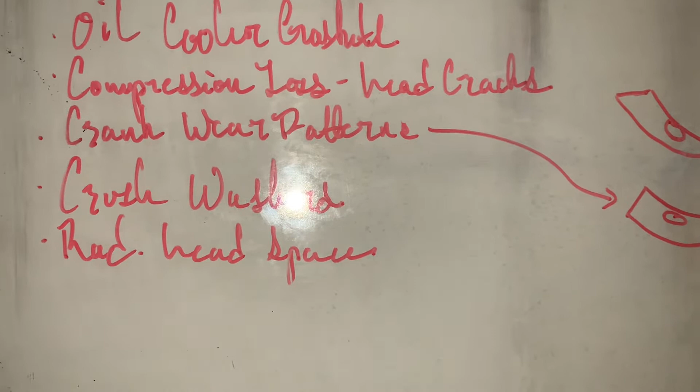Second thing, compression loss from the cracks in the heads. So it'll cause a white smoke issue. It'll cause a lack of power as well, because it's leaking compression through the cylinder heads. It can do it into the cooling system, and it can also do it past the intake or exhaust valves, back up into the intake or exhaust manifolds. That's really the main concern, is loss of power and white smoke, and you'll never be able to get rid of that white smoke with injection system things. You need new cylinder heads.

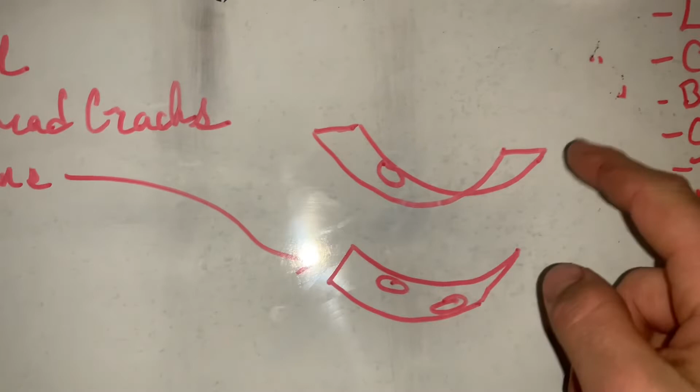Third thing is the crank wear patterns. So here I've drawn, this is sort of a side view of a crank shell, and then this is more of a top down. But when I pulled that motor that I had on the stand apart and I pulled the main bearings out of it, it had two spots that were worn, because these are 3-layer bearings. So there's, I think it's babbitt, and then aluminum, then copper, then the steel backing plate is how they're layered. And it had worn all the way down through in these two spots to that copper layer.

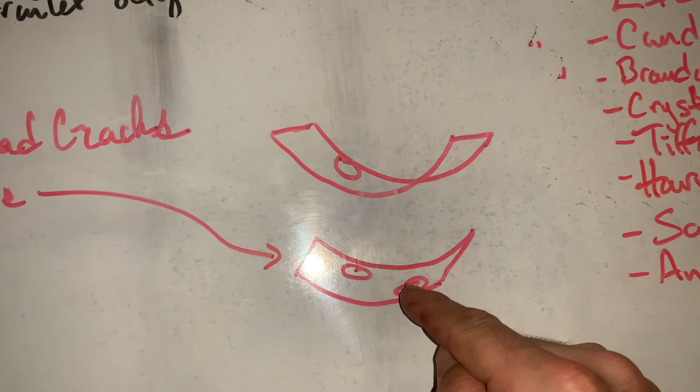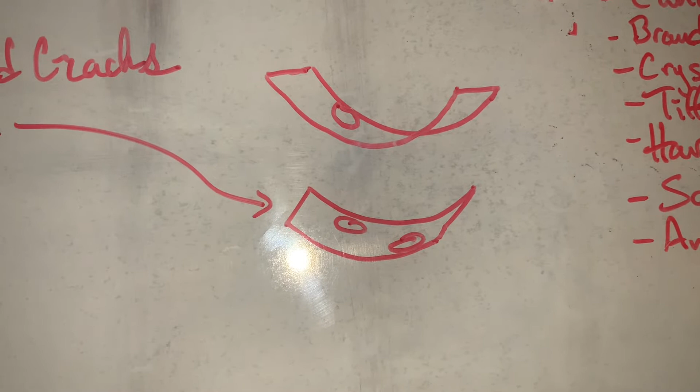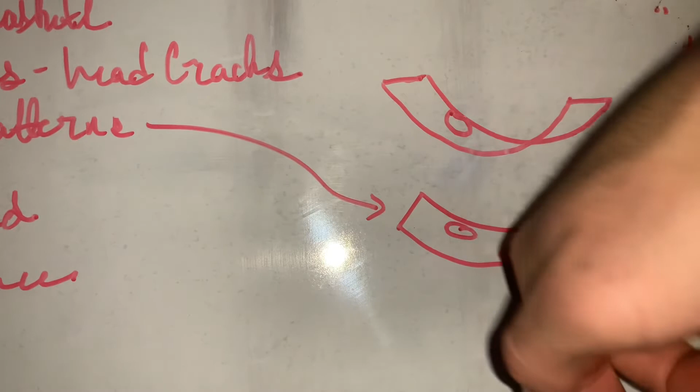And I think that was because somebody had run it hot, i.e. they'd had a turbo on it and they were pulling really hard with it. It's pretty common for these to wipe bearings, but this wear pattern indicates that you should probably have the crank checked at least in a pair of V-blocks to make sure it's not warped, because this can indicate odd wear patterns. It wasn't just worn down the middle, it was worn offset, i.e. the piston was coming down this way on its power stroke, and so that was where it was wiping it away, because you got a piston here and then a piston on this side opposite it. So it kind of makes sense that these mains had worn that way.

And the crush washers in the cylinder head, I think I addressed that properly, but again, if those crush washers can't seat against the head, you'll have a loss of compression and a white smoke issue.

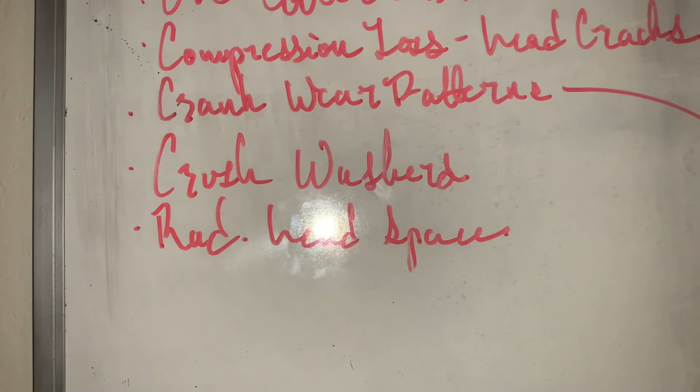Excessive fuel consumption. Normally these motors should get between 15 and 25 miles per gallon, 15 city, 25 on the highway if you're really conservative, maybe 18 towing on the highway, 18 or 20. But again, if you've got misfire, lack of compression, you're having to work that thing hard, it'll get maybe 10 to 12 miles per gallon, which is about what I'm getting, especially if you have to warm it up all the time.

Final thing, you'll notice how in one of those videos a bunch of coolant came out when I opened up the rad cap. That was because I didn't have any headspace in the radiator. Normally it likes about half an inch to an inch of headspace beneath that. So you got the radiator filler neck that goes down, and then you've got the body of the radiator, and you like some headspace up there. Keeps it from pressurizing the cooling system unduly.